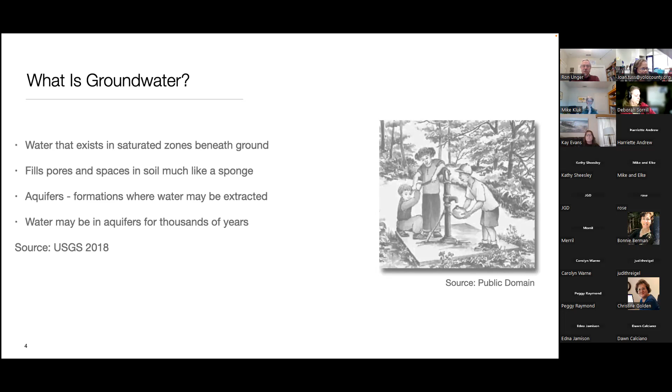So groundwater, it's in the name. Literally, it's the water in the pore spaces among the sand, rocks, silt, and clay that sits very deeply below us. Aquifers are water that can be extracted, in formations, typically large formations or basins that fill and can be extracted. And the water in them can be there for thousands of years, important to note.

Why should we care? 40% of our typical year groundwater supply for irrigation and drinking water comes from the ground statewide, and in drought years that could be 60%. Climate change predictions show we're in an extreme climate pattern, not just by the end of the century, but transcending through time. We have droughts, floods, and wildfires naturally, but because of climate change we expect those extremes to get stronger: drier droughts, longer droughts, bigger floods when they occur. By the end of the century, the snowpack we rely on from the Sierra Nevada is expected to shrink by 65%. So groundwater becomes ever more important as our supply.

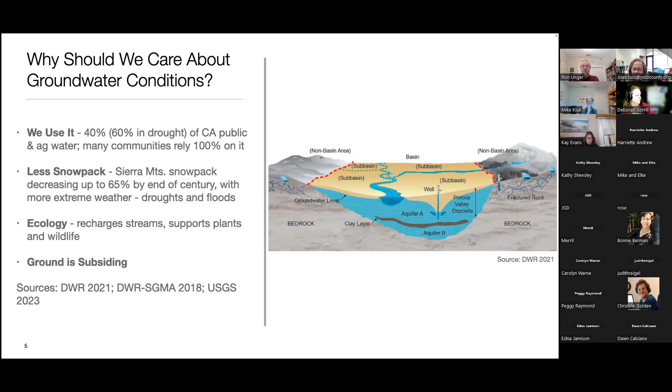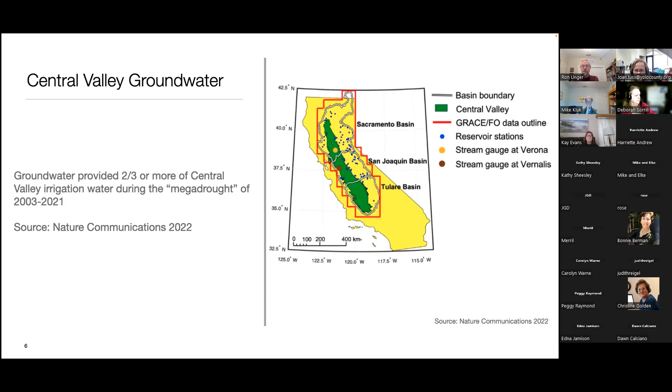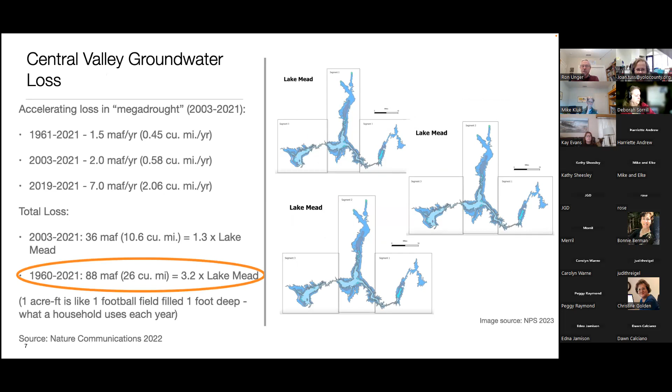Ecologically, groundwater recharges streams, supports plants and wildlife, and we're sinking, I'll tell you about that. In the Central Valley, two-thirds of irrigation has come from groundwater during the last two decades. The amount we've extracted from the ground in the past 60 years is equivalent to 3 Lake Meads. Lake Mead is the largest reservoir in the continental US, if not all of North America, and we've pulled out the equivalent of 3 of those in the last 60 years out of the Central Valley.

Our groundwater loss as a result is that 64% of monitoring wells are now below average, and half of the Central Valley basins are considered critically overdrafted. Between 2012 and 2016, just that 4-year period, 3,500 more wells went dry, which means residents and businesses are affected. If you're a small business, small farmer, or a resident, your whole community may have dried up, or your home, and you're out of luck.

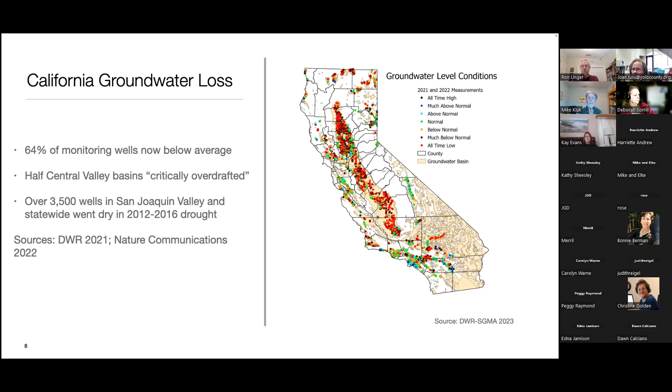So locally, thanks to the Yolo Sub-Basin Groundwater Agency, part of the state system I'll talk to you about a little later, they have made available all the wells in the county that show monitoring data. You can click on this link, I can provide it later in the chat if you wish, or you could just note it, but it's live and it's for the public.

Live, not meaning in real time, but the monitoring is pretty up to date. And so if you look on the right-hand side of the image, you have some examples.

The area in southwest county, Yolo County, out by upstream on Putah Creek, in that region, the trend has been from -60 to -100 feet up until about 2005. And then from 2005 to 2020, it's been progressively deepening now to as much as 150 feet. So that's not good news for farmers.

I recently heard Craig McNamara talking about his farms going dry, and he's done tremendous work in California and nationwide, even helping to start or found the Center for Land-Based Learning. His wells are going dry. The wells are 100 feet. What's he going to do now?

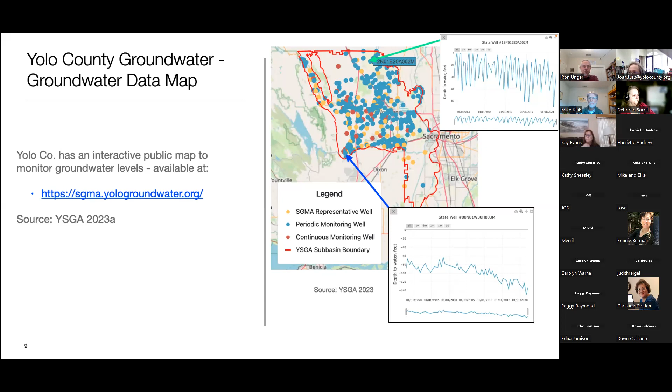The drought and pumping has pulled that down to 150 feet. The top image on the right there is 0 to 60 feet deep over time, and since 2005, now it's going as much as -100 feet. So if you're interested, you can look at this map at any time.

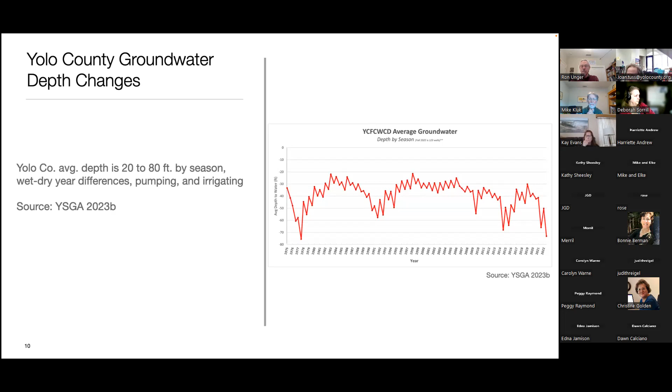Our depth in the county is generally 20 to 80 feet deep, depending on the season, the amount of rain we got that year, the pumping, and the wet, dry periods in the year.

And so importantly, from this pumping, we're subsiding. I try to think of analogies all the time, and I thought, okay, well, are we talking about a layered cake that's in the oven that's sinking after the hot gas releases, or are we talking a water bed, for those who ever had a water bed?

I'm going with the water bed. Forgive me for that, but if you think of the Central Valley as one gigantic waterbed, maybe 10,000 square miles or more, and we're pumping the water out of that, obviously there's sand and rock and clay in there. As we pump the water out, the ground subsides, and a good deal of that subsidence is from the clay layers that have had water in them for thousands of years. I'm not sure anybody knows how many years. But as that clay is dried up from the water that's in it, it doesn't expand again. And so the ground sinks.

And what is happening is the farmers, and I don't say this pointing the finger at anyone, it's just what's happening, are pumping more and more water out of the Central Valley. They changed their crops from annual row crops like lettuce and cabbage that could be fallowed, to nut crops that can't be fallowed. So they're pumping year in and year out, regardless of the drought. They have to keep pumping for those crops. That's what they're making money on, that's what they're pumping the water for. And that accounts, regardless of the drought and with the drought, for a lot of why we're subsiding.

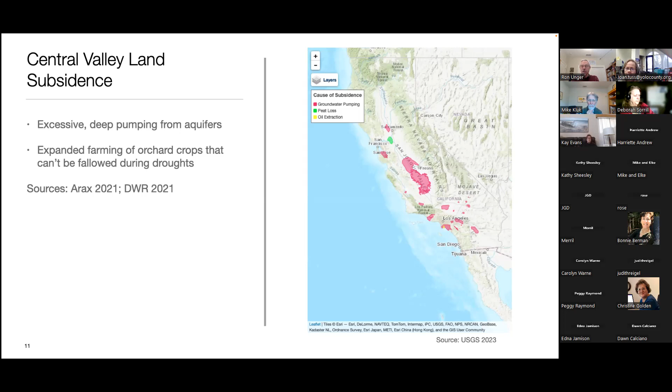Well, guess what? We're still sinking. It's an amazing amount of sinking, that 5,000 square miles of the San Joaquin Valley sunk by a foot, in some areas as much as almost 30 feet.

And you may not know this, but the North sinks too. We're not sinking as poorly as the Southern Valley, the San Joaquin, but the North has sunk since 1925 to 1977, 4 to 6 feet. And if you look at the numbers below, the first part of this decade, we sank another up to 4 inches in the Davis-Dixon area, up to 10 inches in the Woodland-Zamora area.

And then it's increased. The subsidence in the last decade was 2 to 5 inches, 7 to 14 inches. So we're sinking faster.

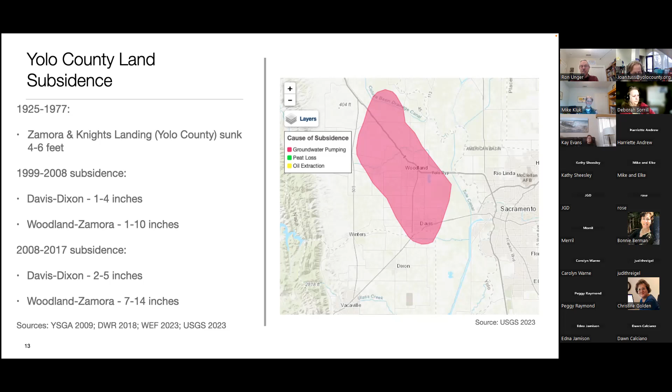In 2021, during the drought, and we're still in the drought, the southern portion of the valley dropped almost a foot, and the northern portion dropped over a half a foot. The Davis, Woodland, Dixon area dropped 1 to 3 inches.

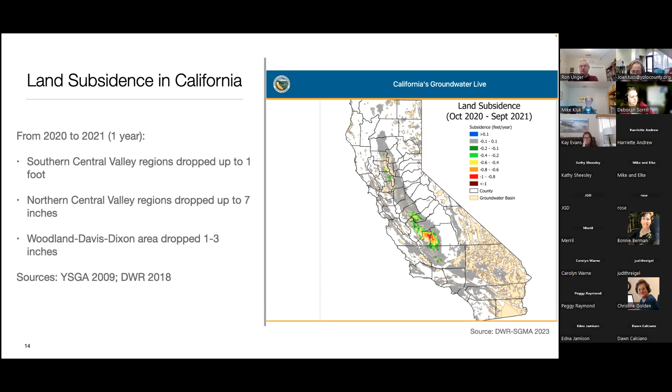So we're sinking. What's that mean? The effects of land subsidence, year to year, we might not see much. You look around, the sky's still there. It's hard to see it in many areas.

But what's going on is you get reduced flow in the channels and the aqueducts, the big water that moves from north to south, Northern California, Southern California, and throughout the valley. It's more expensive because you have to get it over the humps. There's damage to roads and infrastructure, millions of dollars of damage. There's increased energy to pump ever deeper wells, now up to a half a mile deep. And we're not talking one well, we're talking thousands.

There's uneven harm to poorer residents that can't dig that deep. They don't have the money to do that. Losses to businesses, residents, farms, whole communities have gone away. And loss of wetland habitat that provides value for fish and wildlife in the streams and rivers in the dry seasons.

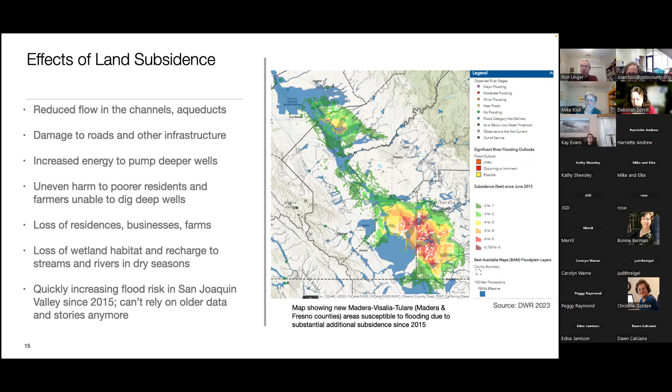The image on the right, the colored areas, not the blue, but the other colored areas, are subsidence areas since just 2015. Up to the deepest red or purple there is up to 7 feet deep since 2015. What that means is if you live in this Madera, Visalia, Tulare, Fresno County area, and you just moved there and you looked at some old flood maps, you may be in for a surprise.

Those old maps don't show you as in the flood zone, and now you are. So what can we do about it? Well, in 2014, the state passed the State Groundwater Management Act and said by 2040, we need to get things into sustainability. We're probably, if not the last state, one of the last states to manage our groundwater sensibly. Thank God we have this new law, but it's another 17 years before we have to achieve sustainability in these critically overdrafted groundwater basins.

And perhaps an unintended consequence of this is that the drillers, the well users, farmers and others, are using as much water as they can, both for their expanded crops, nut crops mostly, grapes also, but to get the allocation they want to have by the year 2040, when the laws are saying, okay, who gets what. And so we're sinking faster.

We have 515 defined groundwater basins, and they can hold way more water than our surface reservoirs can, maybe 10 times as much. Some of the innovative things that farmers and others are doing is an example in the Kings River Conservation District, which I had a small role in giving a grant.

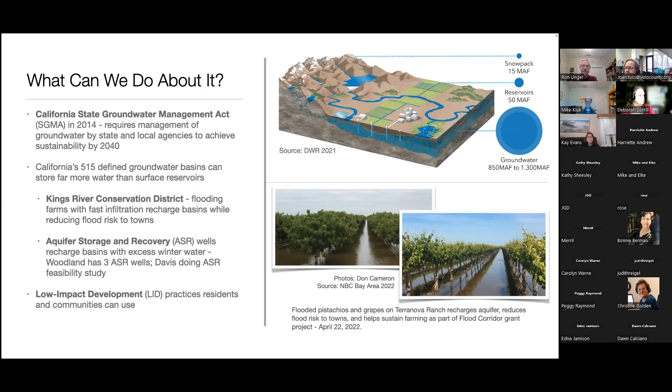So what is low impact development? Basically, think of your community with roads and pavement, and parking lots, and your own house has drainage systems, stormwater systems to keep your house from getting wet. You don't want that. But before your house was ever there, all that rain went into the ground, unless you're on a steep hill, and even then it went into the ground.

And what we've done is we've shunted it away from your house and put it into stormwater systems that take all that water in a community, including every house and business and parking and street, and we shunt it off into stormwater systems that send it, in the case of Davis, into the Yolo bypass. In case of many communities, into their local streams.

Well, those local streams then get polluted, they get eroded quicker. And then in the summer, when you would want the streams to have water in them, the groundwater isn't there because it hasn't gone into the ground to slowly go back into the streams.

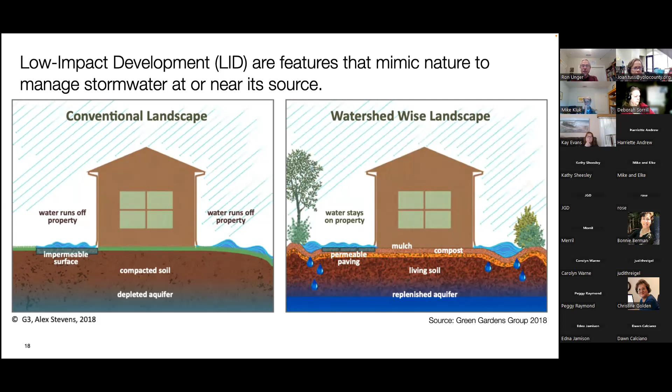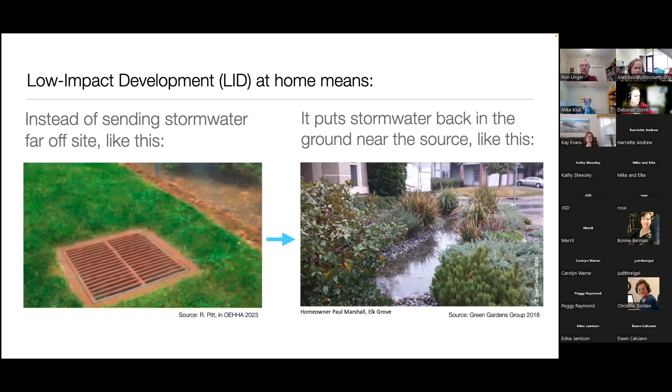So what low impact development means is take it away from these stormwater drains and put it right back onto your property one way or another to subside into the ground right there in a nice way. And what it does is enables that groundwater to fully recharge the streams in the summer when it's dry.

It basically is helping to put back a gap that development and extraction have formed in the ground, in the hydrologic system. The hydrologic system is a full cycle: evaporation, rain, groundwater recharge, stream flow, and then back to evaporation. That's what the cycle is in a nutshell.

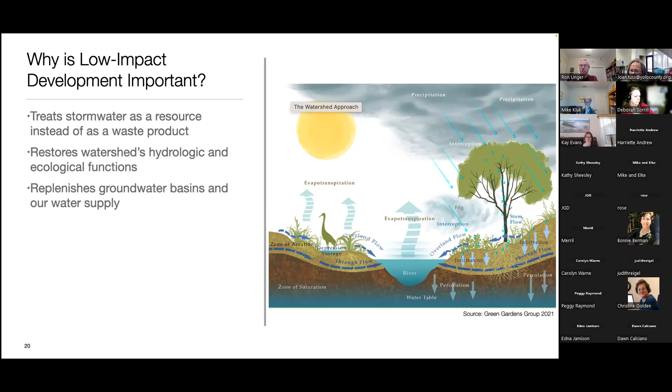And when you take out the groundwater, because you've shunted it off site, you've sped the water away from its natural cycle. And instead of slowly going back into the streams, it goes away faster. So you've broken the hydro cycle a bit. And what low impact development does is put it back in the ground.

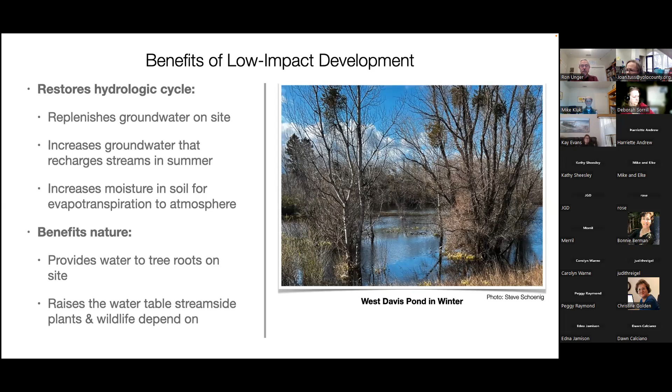So it restores the groundwater on site. It increases groundwater recharge to streams in summer. It enables plants on your property and in general by stream sides to have evaporation and transpiration that helps the atmosphere. It provides tree roots water on site when it's there, and then it raises the groundwater table so that streamside plants and wildlife can benefit from it.

It beautifies. If you do these different types of features, you can really increase the value and beauty of your house.

It also provides wildlife benefits. It reduces the impacts on downstream erosion and pollution to streams. It protects you if you have puddling or flooding issues on your property. You can reshape your topography and do these features to get rid of those puddles on your path.

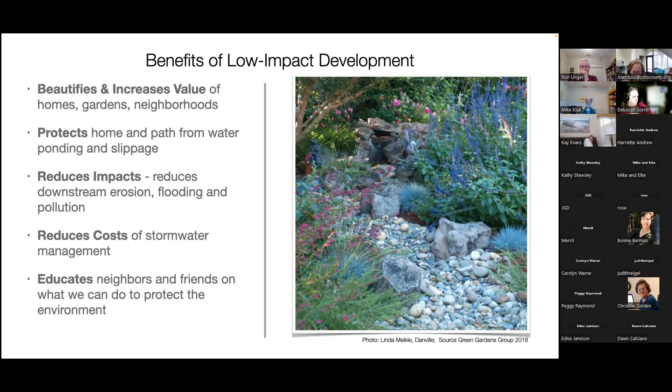And you can educate your neighbors to help out. It reduces the cost for regions and communities to manage floodwater by having less of it go to the stormwater system. So these are a number of different types.

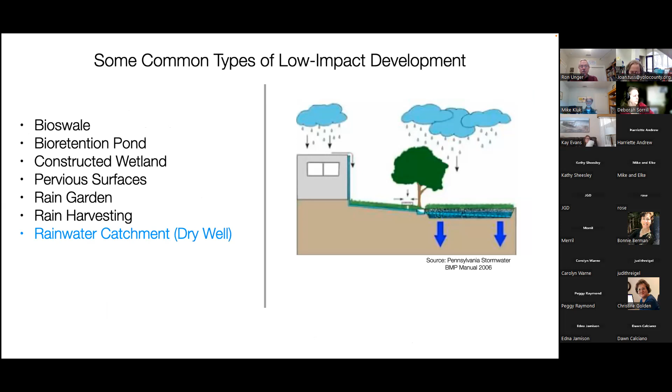I'm going to give briefly an overview of what they are, and then I'm going to do a deeper dive, yes, pun intended again, to how to build a dry well. A bioswale is really just a long trench with vegetation and organic matter and drainage materials.

The image on the left looks pretty technical, right? It has a perforated pipe, it has gravel. That's a French drain concept if you look at the bottom there. But it also has above it infiltrating soil, and then above that, plants that can withstand flood flows. And what it's doing, just like the images on the right, is simply slowing the water and helping it infiltrate on site before it goes into the storm drain. If you have an overflow, the overflow goes into the storm drain.

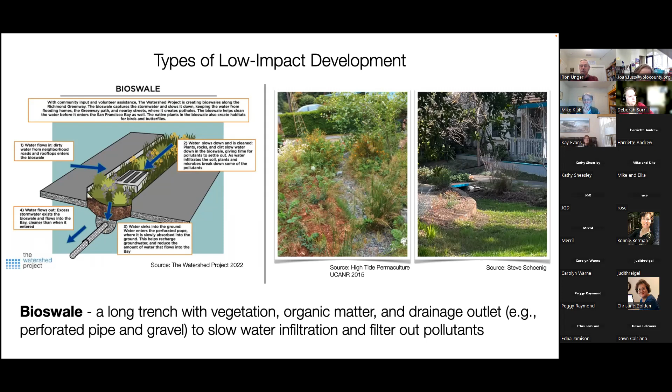You can build a swale very simply by micro topography, sloping it away from your house and making a sinuous, snake-like curve through your property, and making it pretty, like this stone image. Or you can do a number of different things like that. You can make it highly technical, or you could just slope it and put gravel on, and that'll all help slow the water and infiltrate more on site.

A bioretention pond is an engineered basin with an inflow and outflow, a drain that if it's too full will go back to the stormwater system, and it's going to hold water a longer period of time than the swale. It's going to collect it, and the vegetation in there needs to be tolerant to both wetland types of water situations, ponding, as well as drought in our region, because it's going to dry up in the summer most likely. There are a number of native plants that do that. The California Native Plant Society has an online source for what plants can tolerate those situations, and nursery growers can tell you what can work for that.

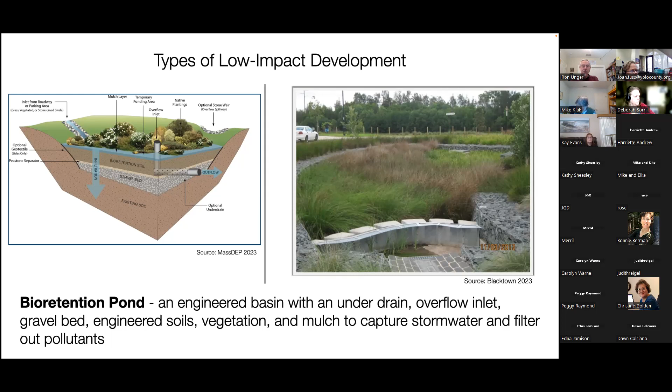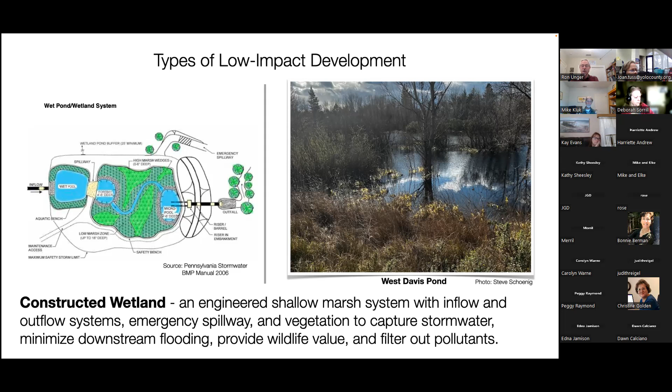A constructed wetland, like Davis wetland, West Davis Pond excuse me, is a bigger thing that's going to have water probably year round. It provides wildlife habitat, same concept. It's just holding water for a longer time, and it's going to infiltrate, clean the water on site, filter the pollutants out, and the plants that grow there are going to be water tolerant.

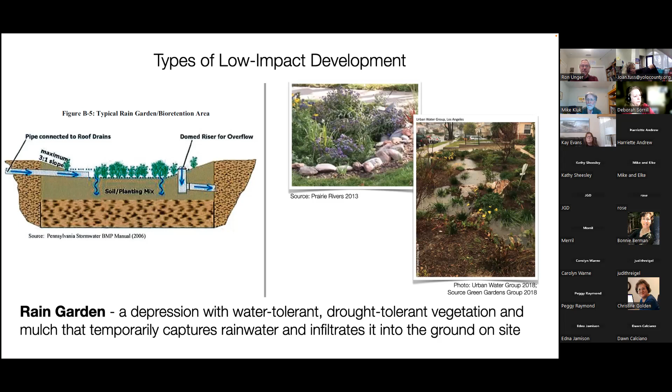So I'll take a quick question on those and then dive deep on the dry well.

Your question is, can you recommend a ground cover for dogs?

We had a dog and we had mulch in our yard, and it worked well. I don't know any specifics about what you can and shouldn't have for dogs, so maybe somebody else on this call does have an answer.

Joan? That was your only question. All right. Well, it remains answerable till the end of this session by anybody else on the call. All right, so...

I calculated that the irrigation we would need for our yard in summer would be the size of our big living room, and I think that's a big hold. So we don't have one, but you can use this and people do, and it's kind of a fun thing.

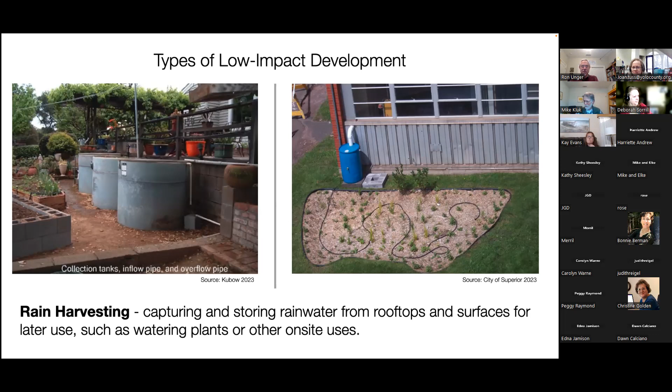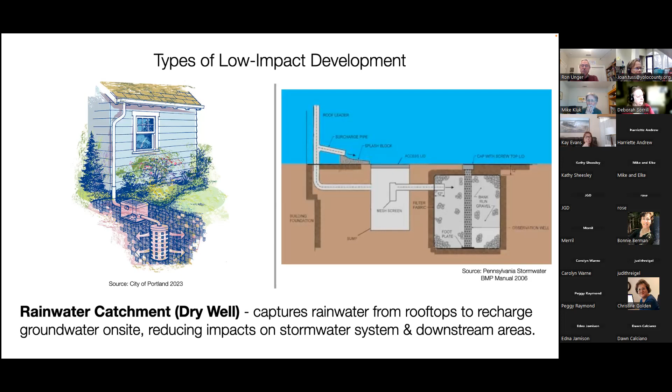What you need if you're going to build one is good drainage, and that's typical of most Yolo drainage. I have fairly clayey soil where I am, and I still can do it. But regardless of how good your drainage is, you want to connect to the stormwater system, because there will be times when you didn't calculate right and there's more water volume coming off your roof than the capacity you built. The water table should be low so it has something to drain to—10 feet or deeper is good.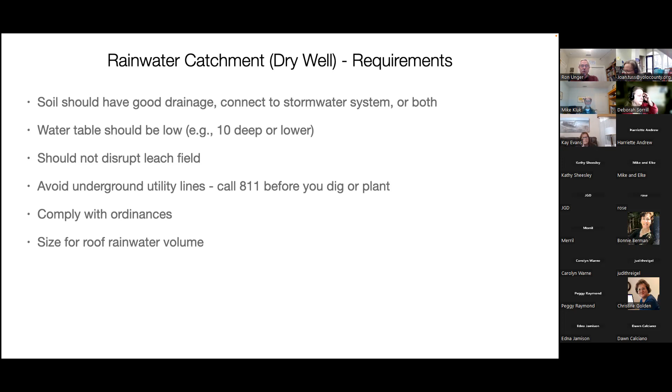You don't want to interfere with leach fields, and you definitely want to call 811 before you ever dig deep, so utilities will come out for free and tell you if there's something there you need to avoid, like a utility line. Comply with local ordinances and size it appropriate to the roof you're draining it from.

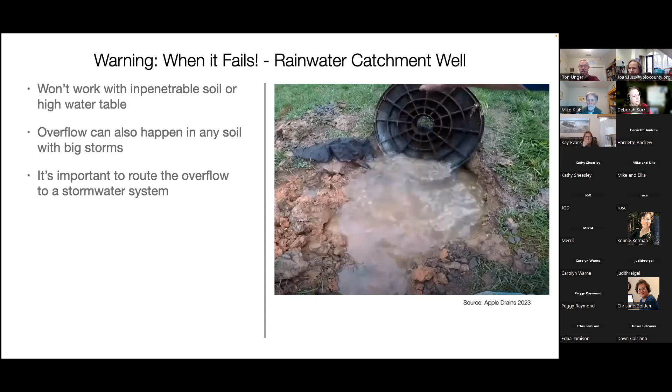Here's a warning: this was a poorly draining site with very cemented clay soil, and the capacity was small—basically the size of a garbage can. They're really not capturing much here. What they ended up doing is digging a trench and sending it directly to the stormwater system. It wasn't going to help.

You're going to choose what type of well you want: a rock-filled hole, which is what I did, or a plastic insert or cement insert. You'll want to find a location at least 10 feet away from the house, recommended away from property lines, where it slopes down—or where you can make a slope or drainage to your existing stormwater drain in your yard. You want your downspout to connect either underground, like I did, or overground. The benefit of overground is it won't clog.

The detriment of overground is you're going to have to build a swale between the downspout and wherever you put your dry well. You can put a debris catchment in—I didn't. If you do that, you can clean it out, and that stuff won't go into clogging your dry well. But if you put gutter leaf guards on, there's a double benefit, because you're not going to have to climb those darn ladders or get up on the roof as much anymore. And I love that—we have that on our house.

There's some really good leaf guard systems, and there's some bad ones too. So it's good to do some research. I was going to bring that into this, but I said no, that's beyond the scope.

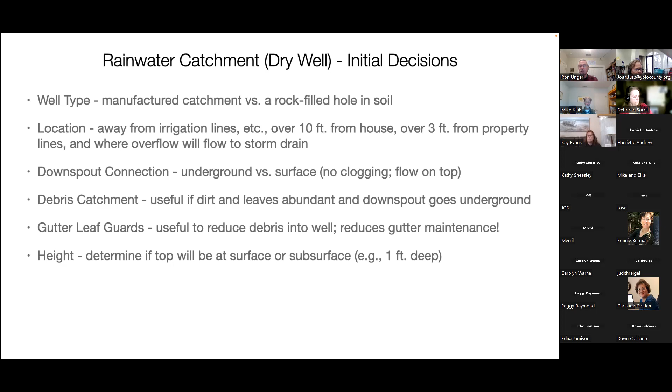But you can ask me and I'll tell you what I've learned. The height is either underground or above ground. If you do it underground, you might want to have an escape pipe that goes above the well to allow the excess water to go out. If you put it right on top of the ground, you're going to build it in a way that lets the water flow to your stormwater drain, which is what I did. So handy dandy, This Old House has a 6-part how-to on building it online, and I modified it to add some things that I think are important.

They say build it 4 feet deep and wide, at least 10 feet away, 3 feet from the property line, 10 feet away from your house. And what I added is locate it so the overflow will be to your stormwater, away from the house.

For safety reasons, it's very important, in my opinion, that you dig and fill that hole in the same day, especially if there is any chance of kids or small animals getting caught in it. Even if you cover it, somebody can lift it or dig under it and get caught in there. So ideally, dig it, don't dig it too deep, fill it, plan ahead, and fill it in the same day. I'm just safety oriented.

Depending on the soil, you don't want it to collapse on you, so don't dig it too deep. But you might slope it so that it's not as likely to collapse—slope it away from the bottom of the hole. You also want to dig a trench that's 1 foot deep and 6 inches wide, so that you can put your drainage pipe into that.

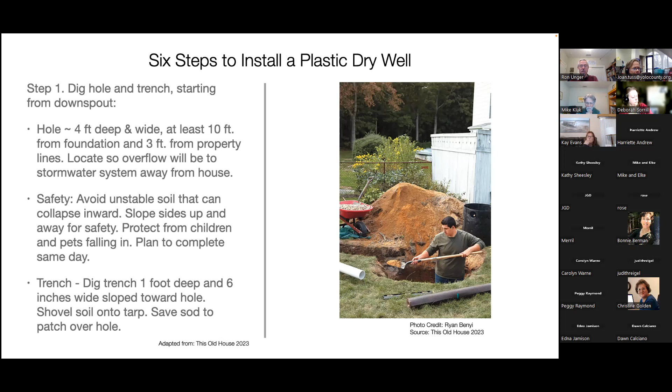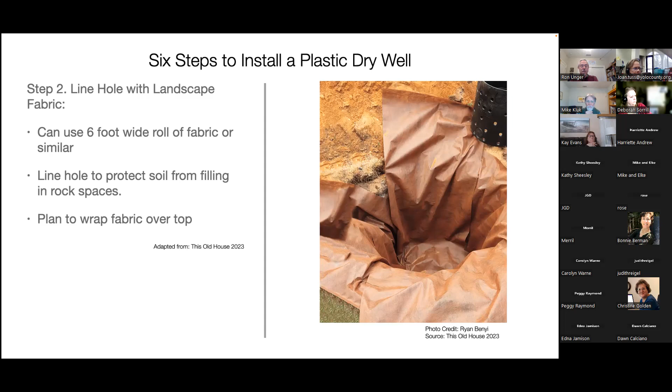If you have grass, you're going to save the sod, and put the dirt on a tarp so you can make your yard look nice again. Second step, you're going to line it with fabric, like weed protection barrier, and you'll need enough fabric to go over the top. That keeps the soil from going into your hole.

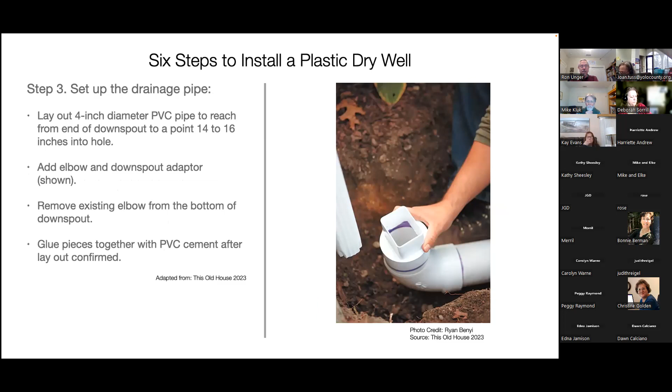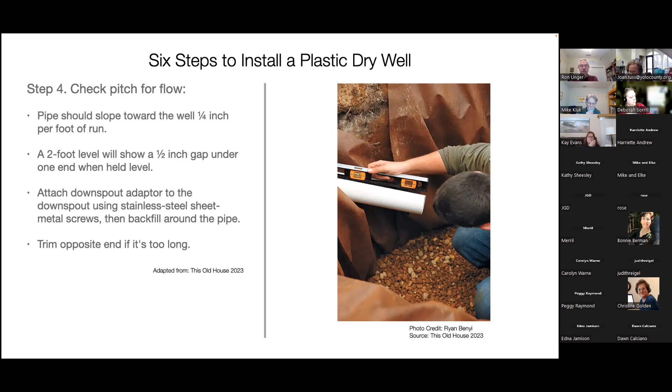The pipe is a 4-inch PVC pipe, which is what they recommend. I recommend a perforated 4-inch pipe that has holes in it to drain out—theirs is solid. They connect it to the drain pipe, and then send it to the well, making sure that it slopes down to the well, and that it goes into the plastic tub they put in the well, like that. They also pop out the holes in that plastic.

You can make this, by the way—some people say you can make it with a garbage pail, like a stainless steel one, or a very sturdy plastic one. You pop out the holes, pop out a 4-inch hole for the PVC pipe to go in, and you want to make sure it flows by gravity from your downspout to the hole.

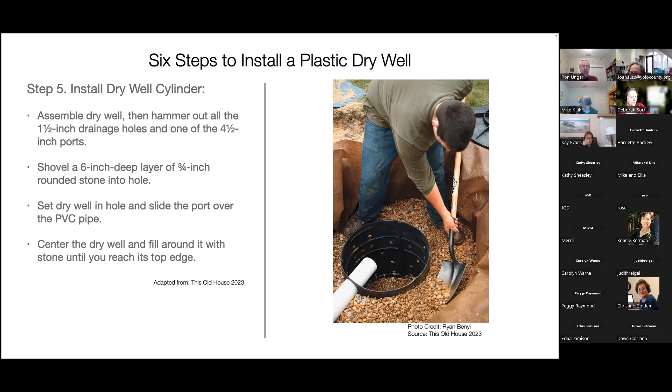They only fill their hole 6 inches with rock—the rest of that space is all for water to flow out from. Then they fill it with rock around the hole. Then they put a cover on it, and they put an emitter on it, as you see in this image, so the overflow can pop off to the top of the ground. They level it so it lines up with the top of the ground.

And then they put landscape fabric over the top after they fill it, and they put sod and soil back on, and they're done.

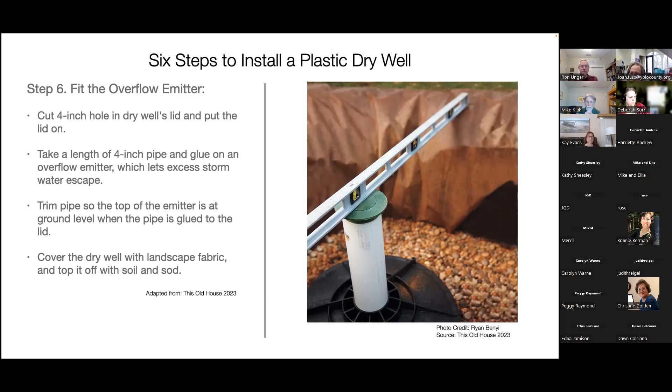Our system required that I measure, which I recommend anyhow, the size of your roof: 12 feet wide by 30 feet tall for this segment of our roof that drains to the downspout on the right of the house. So that's 360. Then I figured what kind of normal rainstorm we'd get, about a 1-inch storm, maybe should have gone with 2 inches, but I went with 1 inch for a typical storm that drains out before the next one comes. So 0.083 is what 1/12, or 1 inch, is, and multiplying it all out gives 30 cubic feet of volume needed.

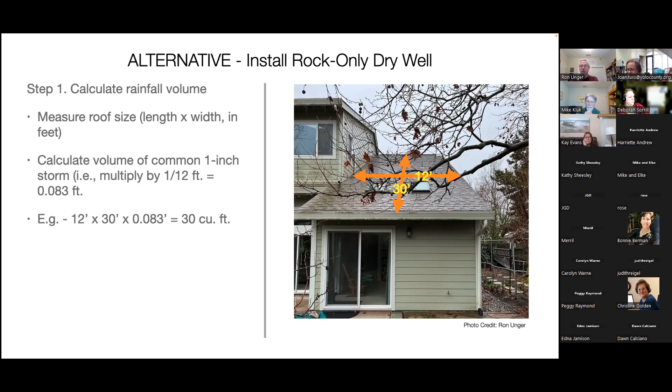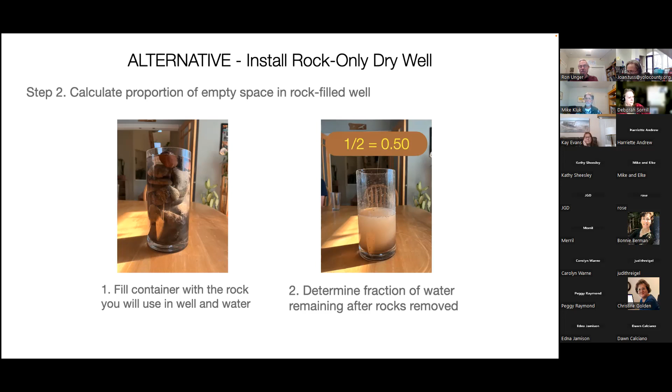Then I used this very sophisticated scientific apparatus called a water glass. It's a big glass, and I put rocks in it and filled it with water. I took the rocks out and measured the water. Lo and behold, very scientific here, it was exactly half, maybe 0.49, but basically half. That means I need twice as much volume, because the rocks take up half and the water the other half. The way you calculate that, since it might not be half depending on your rocks, is you divide the 30 cubic feet by whatever proportion you got, and that tells you how much bigger your capacity has to be.

So we decided to dig it 3 feet deep. That means 20 square feet of surface area for the hole, and 3 feet deep. We built it 4 feet by 5 feet, and 3 feet deep. I don't have an overflow drain like you see in this image, and I don't have a debris catchment like you see in this image. But I do have, unlike this image, our dry well going all the way up to the surface with just mulch over the top so it can drain right out. But if you sink it, you'll want an overflow port to emit the water.

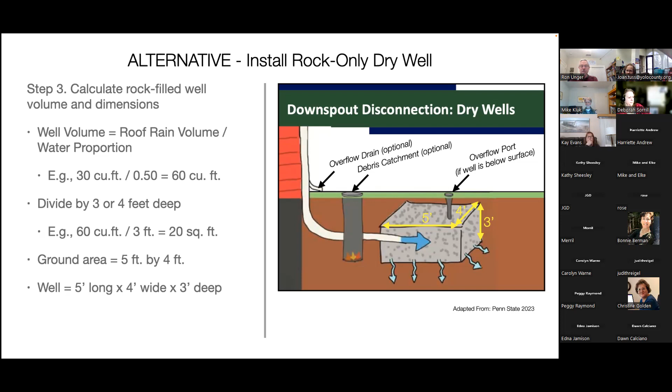So you dig your hole, then you dig your trench, and you put a 4-inch perforated drain tubing in, if you do it my way. If you do it the This Old House way, you can use a solid pipe, which keeps the water from getting the soil wet right by the house. That's a benefit. Our drainage pipe — this isn't actually our house, I got these images offline — but if you dig your trench away from the house, it won't leave much water near your house. That's why I did perforated pipe.

Either way, you dig a trench about 1 foot deep, sloping slightly towards the well. That image on the far right should actually be a little more sloped. I did not use a debris basin — I just have my downspout go straight to the pipe underground.

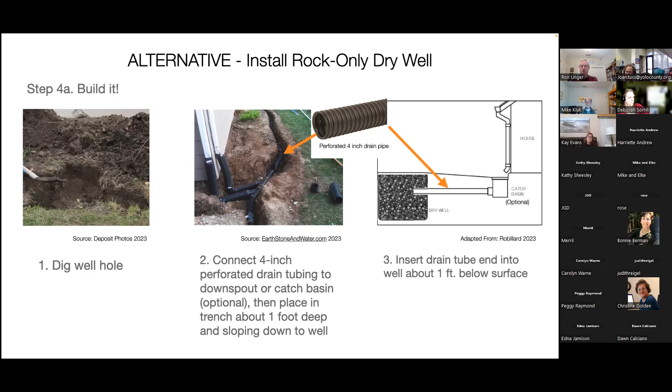Then, importantly, you have an exit for the excess water. You can have that flow on top of the ground to a drain pipe, as in the far left image, or through this French drain effect again with perforated pipe and gravel, or just good infiltrating dirt in the trench that goes from your dry well to your stormwater drain. So you have an inflow and an outflow to your drain, and you want to capture as much of the flow in the dry well as possible.

The middle image is filled with rock, then you put weed barrier over it, and in our case, mulch on top. The image on the top right is what it looks like — you can't see a thing. The bottom right is what it looks like when you take a peek at it to check if it's still good: you lift the barrier and the mulch, and there it is.

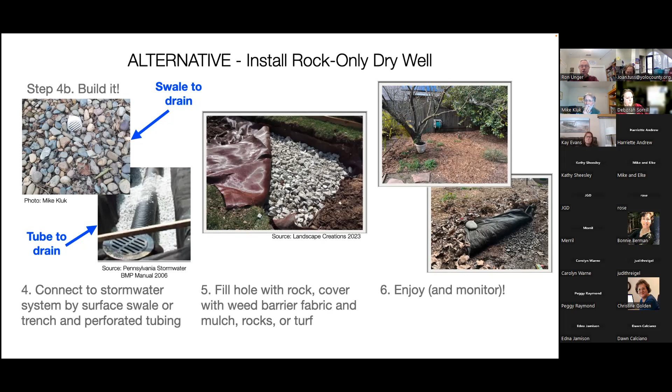So, in summary, our valley is sinking. Neighbors and communities are doing things about it, and we can too.

Some resources for groundwater, if you're interested: the DWR, Department of Water Resources, puts out regular updates on the Sustainable Groundwater Management Act and what's happening with our groundwater. Really good read, I mean that, it's very interesting. Probably the best book I've read this year is The Dreamt Land.

It's an incredibly good book on California's history, farm history, and development history, by Mark Arax, a former Los Angeles Times reporter. It's available at the Yolo County Library by audio and book. There's also the groundwater data map by the Yolo Subbasin Groundwater Agency, and all these resources here, I can put in the chat box if you wish, are available for your benefit on how to build these things.

And with that, I can take questions.